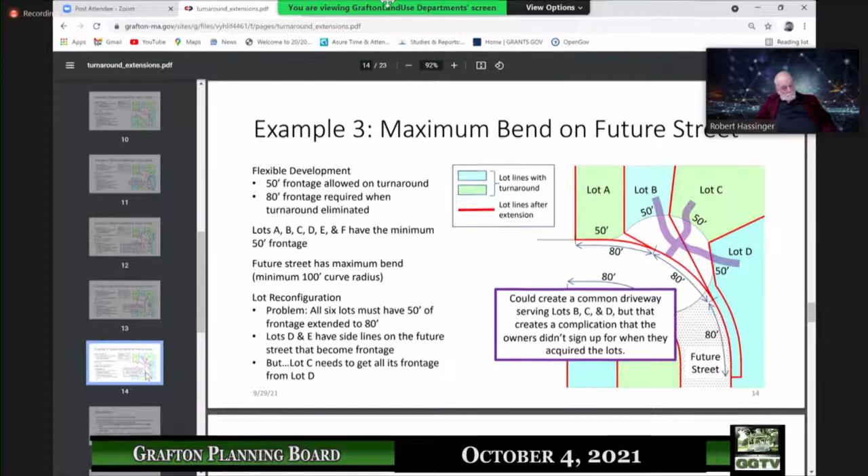The next slide: one way to get around it would be to give Lots C and D an easement over that, so they can use someone else's land to drive over. That's awkward—a common driveway is another awkward situation. This, again, is kind of an extreme situation, maybe hopefully not likely to ever come up in practice. But nevertheless, this shows some of the possibilities, and some of the awkward, adverse consequences and things that are difficult, if not completely impractical to deal with, when you start out with a reduced frontage on the turnaround, then eliminate the turnaround—now you don't get the advantage of the reduced frontage.

So if you plan for this in advance, when you're designing the turnaround and the lots on the turnaround, one of the things you probably want to do is not take advantage of that reduced frontage on the turnaround.

Anyway, and there's—what else? Then there were a couple of examples: Glenwood Lane, Morgan Drive, and Appaloosa Drive are the three places in the entire town of Grafton that I could find where this has actually happened.

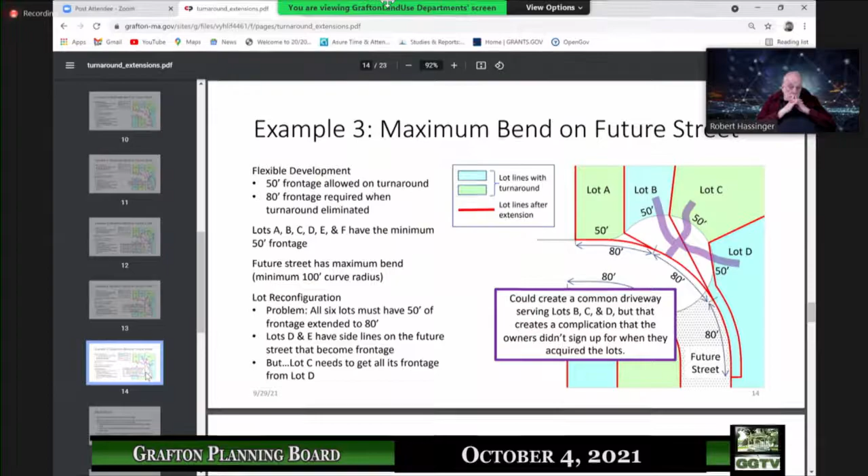They didn't build it that way. They built Lot 2 and Lot 5A that way, and I think they built Lot 4A that way. But then when they came around to doing the roadway extension, they took Lot 3A out of the picture entirely, ran the extended right-of-way through what was Lot 3A, and used some pieces of Lot 3A to add on to Lot 2 and to Lot 4A and other lots. So they ended up with a configuration that worked pretty well. You'll notice they did actually take a chunk of land away from Lot 4A and put it on 5A—that was actually a transfer from one property owner to another. The rest of it was all done; none of the rest was developed. So the first part of that subdivision is developed.

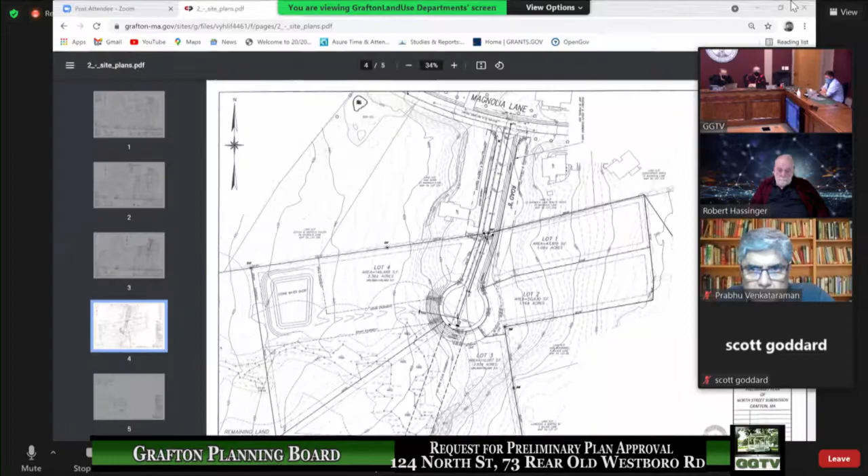So this is a project at a site off of North Street, with access off Magnolia Lane. We were here maybe 2 years ago looking at the same parcel of land for a larger project, I think at the time it was 36 lots proposed, with the main access being off North Street. Since that time we've scaled back the project. The process got a little bogged down, so we're looking at something much more scaled down, something we could try to get moving, something a little more manageable. So we're here before you for basically a 4-lot subdivision now, just a small cul-de-sac off Magnolia Lane.

As you said in the intro, it consists of basically 4 parcels, about 73 acres overall. There's a large parcel in the back that makes up the bulk of the land, owned by Circle Assets. There's also a parcel of land shown on the plan as lot 1, that tail off to the right - that's another parcel with a separate owner.

And then there's also the access point up to Magnolia Lane, which is a 50-foot wide strip of land reserved back when they did the original Magnolia subdivision, reserved as a parcel for future roadway purposes. There's an easement over that for roadway and utilities. The way that's written, it's specifically for roadway extension, any use of a roadway commonly found in Grafton.

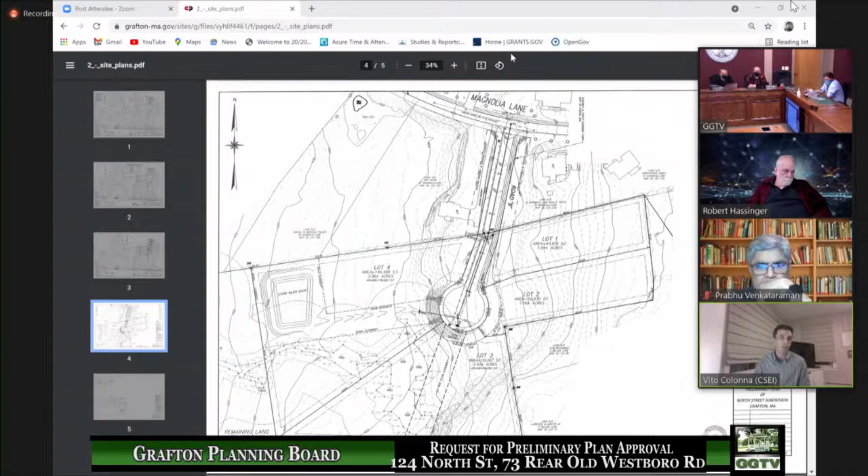And yep, I can share that. Oh, I was disabled from sharing right now. You should be able to share it now. Okay.

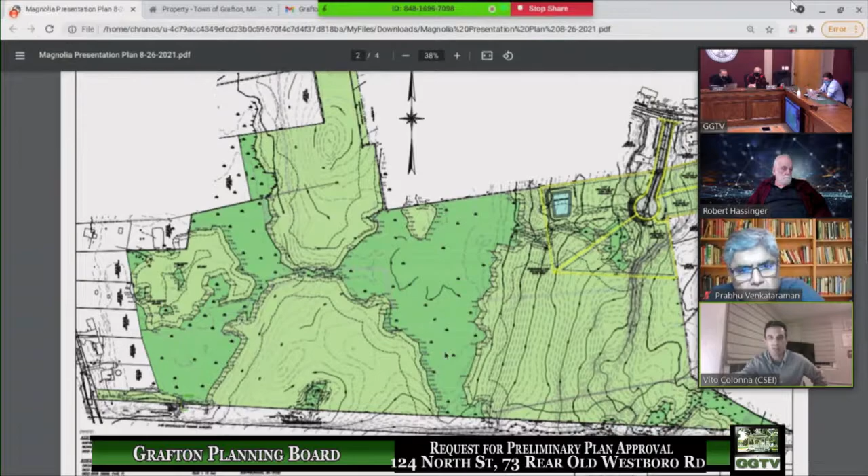There are wetlands running through the site, and some topography changes down in here - it's fairly steep right in there, with a little ledge face right up in here. But this is really the area over here that we were looking at. I wanted to show you for context what the remainder of the site had looked like, and this was a zoomed-in version - I colored it up a little bit just so you can see that.

Okay, I guess I'll turn it over for board comment. Yeah, okay, questions, comments from the board?

Sure, so first question - the PDF I have makes it a little bit harder to read. What is the length of that cul-de-sac? We're at 500 feet. Measured to the center - I think I'm right to the end of it. Yep, it's right to the very end of it. 500 is right there.

Justin, any more? Go ahead, Bob. I had more, but I forgot them. Going on, I'll come back around if you don't get them.

I've got a couple of things on my mind. First of all, I thought this space got covered back with the larger project, but Jeff's peer review pointed out an issue with the neighboring driveway and the rounding on the left side as you leave onto Magnolia Lane. And when I look at the town GIS, it seems to say there's only 106.9 feet there, and that's not enough - I'm pretty sure that's not enough.

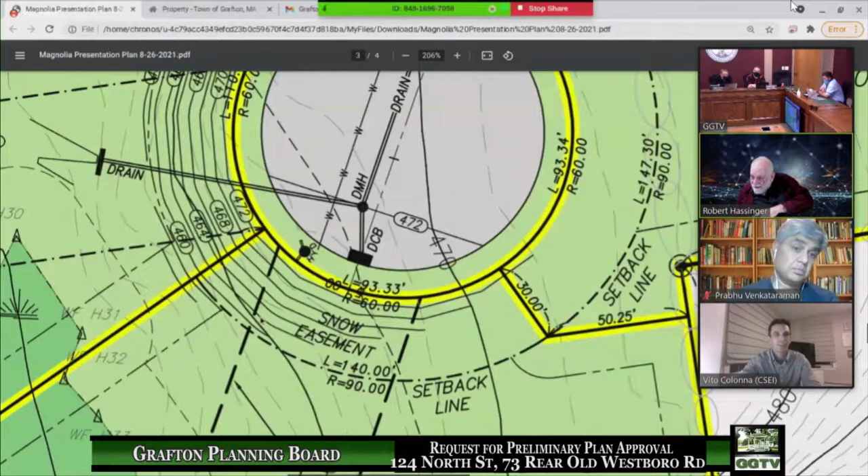Okay, two things. One is, I'm just thinking about all those contours around the circle — what is that? Are we going up or down? I can't read the drawing well enough. So it's going down, going downhill right there.

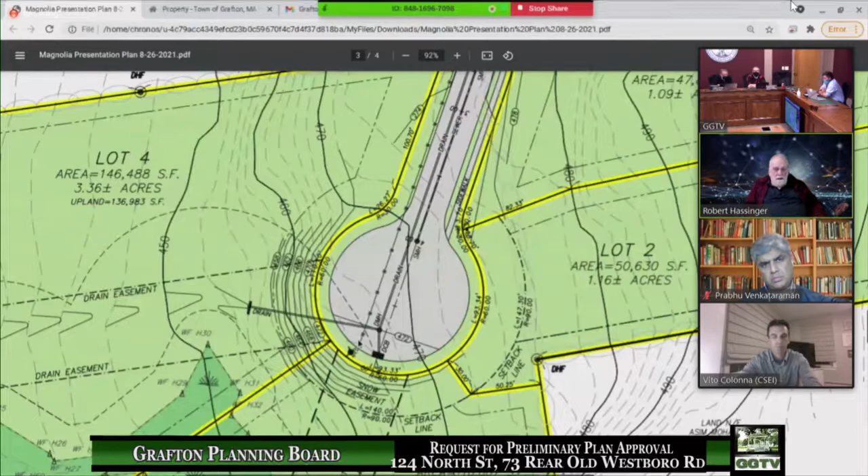The other thing is that I think there are two reasons this rule is in the subdivision rules. One of them is to protect the property owner that this access would benefit. I can see a possibility of we might be able to consider the property owner of the property this connects to waiving that protection and saying that they're satisfied with what's down.

The land of lots 1 through 4 are owned by the same interests as all this other remaining land. They would be, right now. Some of this land up in here is owned by a separate entity, up in lots 1 and 2, generally that area. A portion of that land is owned by another entity.

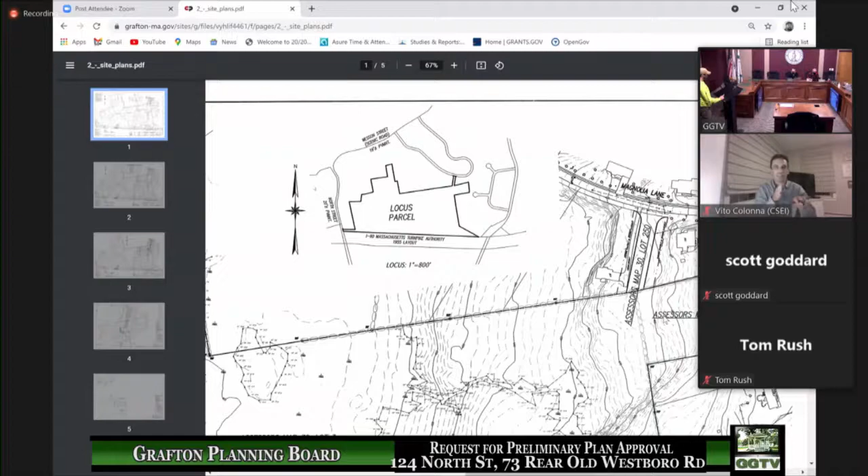Oh, Vito, sorry, you're muted. Sorry about that. Yeah, that little access you're pointing to is between 124 and 126 North Street, so there wasn't an address to be able to give it. So they just call it 124R, for rear. It's the rear behind 124 or 126. That's the only reason - there wasn't an available number to give it, I think, at the time.

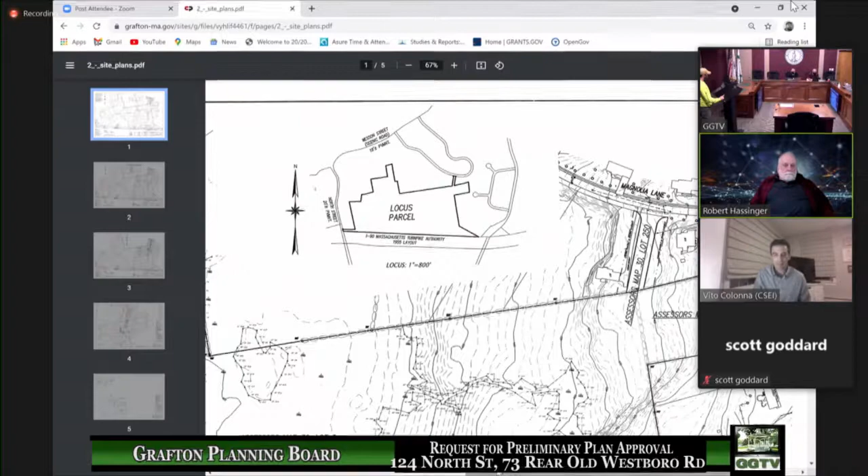There are some occasional things that look kind of odd like that when the assessor assigns a street address to a parcel of land that's kind of away from any street. It's only got that small connection to North Street, but they gave it a North Street address. My back-of-the-napkin math is showing it's about half a mile as the crow flies from North Street to where this furthest edge of this development would be. Back of the napkin math.

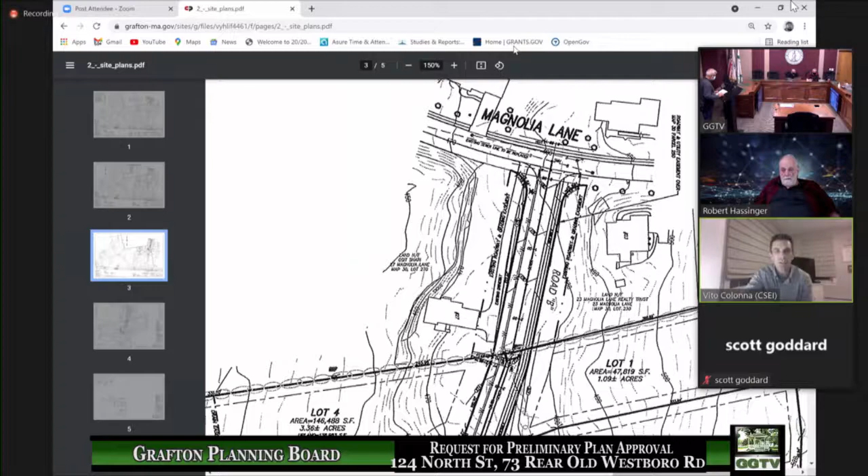I can zoom right in on that area. I think you have a better resolution than what was uploaded. Okay, so I'm gonna zoom right in.

So that driveway right now does go off-site. It goes off of 27, crosses this parcel to get to Magnolia Lane. This little sliver right in here is a piece that does run off-site, off of the abutter site, onto the subject land - this little sliver right here.

As far as the question related to grading and drainage, everything from our roadway would be collected on our site and wouldn't be directed towards that way.

So you're saying that the parcel of land in question that crosses my driveway is that little sliver at the front, not the 200-foot long driveway that goes to the back of my property? I'm just talking about the roadway itself - I'm just trying to get the question.

So this one right here, I'll zoom out just for a second. So this is right now where your driveway is. Correct, right - that's 225 feet long, I believe.

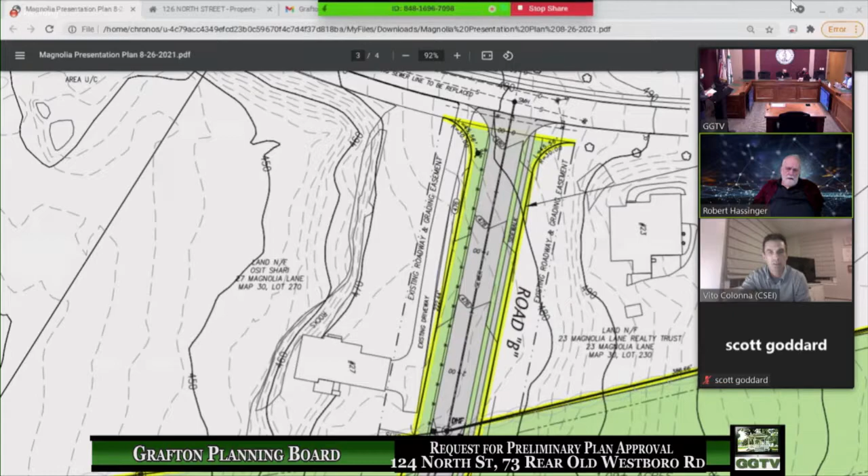The question was asked a little bit ago, is there more information we need? From my point of view, either we get answers to this now, or I'll vote no on the preliminary and let you solve it at definitive.

I hope others would too. I'm not sure whether anybody has any idea what I just said. Yeah, even you. No. Okay. Did you have anything else? That was my main question. Okay, well, thank you. So the point being, do you want to do it now or later, and that might drive whether we close the hearing or not.

You're asking whether the board would like to see some of these things resolved now or later? No, I'm asking the proponent. Would they like to keep the hearing open and get us resolutions now, or would they rather have me and maybe some of the others vote against the sub.

If I could ask, is there any way we could just continue and leave it open? That way we could maybe work through some of these issues. Oh yeah, we absolutely could. I don't think anybody on the board would object to continuing this process for as long as it needs to be continued to get accomplished whatever you'd like to accomplish.